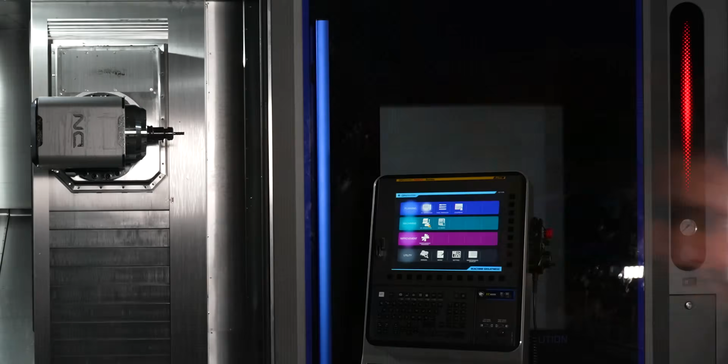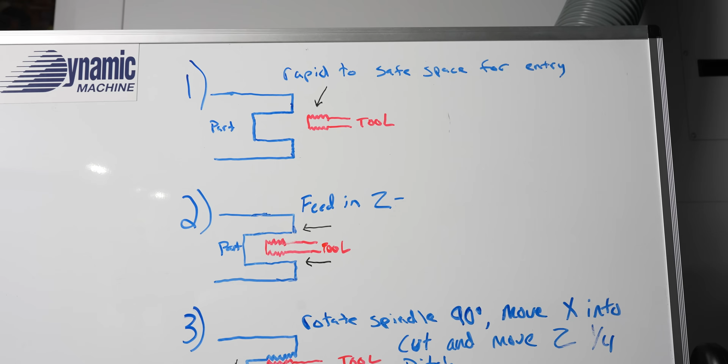Today I'm going to show you guys how to use a multi-tooth thread mill to mill your threads in one pass using the Z and C axis of your lathe. Now, there's a few parts to this video. If you just want to skip ahead to the part where I go over how to use the macro, it's down in the description below. You can copy it, paste it in your program, and go from there. But if you don't really know what we're going to do in this video, stay right here because I'm going to go over every single step as far as what we have to do to achieve a thread with a thread mill using the Z axis.

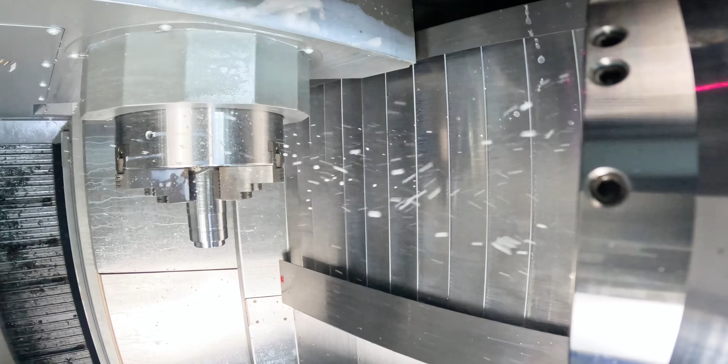Oh, there's always a glare. Okay.

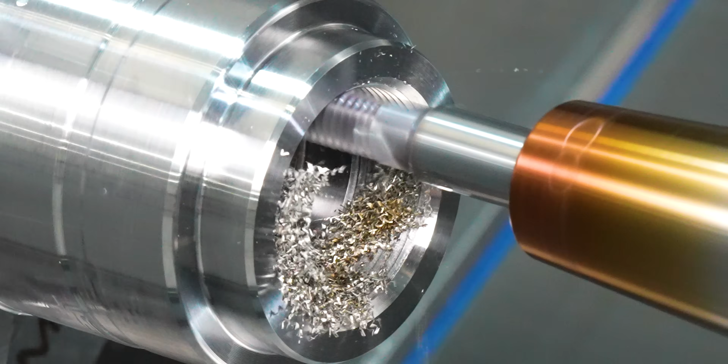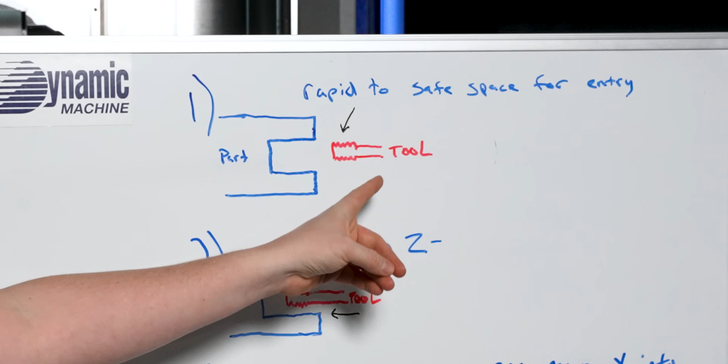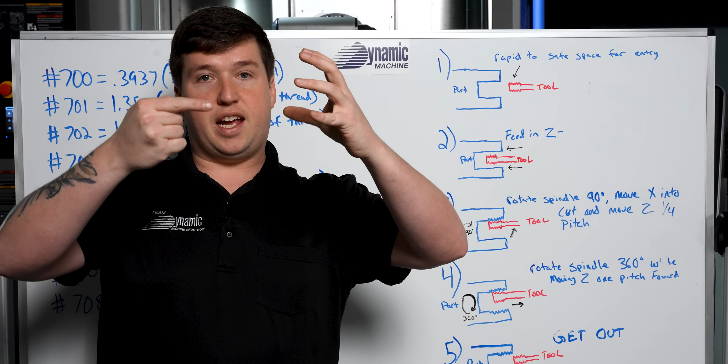So what do we have to do to achieve a thread in these circumstances? Well, first thing we're going to do is take our multi-tooth thread mill and rapid it to a safe spot in front of the material. Then the next thing we're going to do, step 2, is we're going to feed in Z. Now the next step, step 3, we need to rotate the C axis while bringing X up and Z forward. It's similar to the first video I did on this channel.

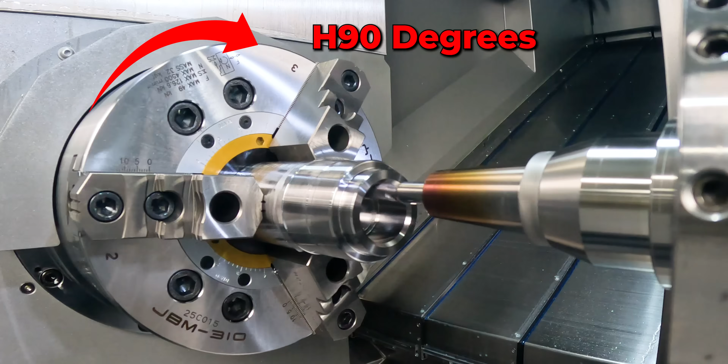You have to helix into your thread. If you just feed straight over, like if you were just to feed straight up in X and then start twisting, you would get a line across the threads because you didn't feed into the proper helix angle of the threads. So it's important that we move up, forward, and twist at the same time here in step 3.

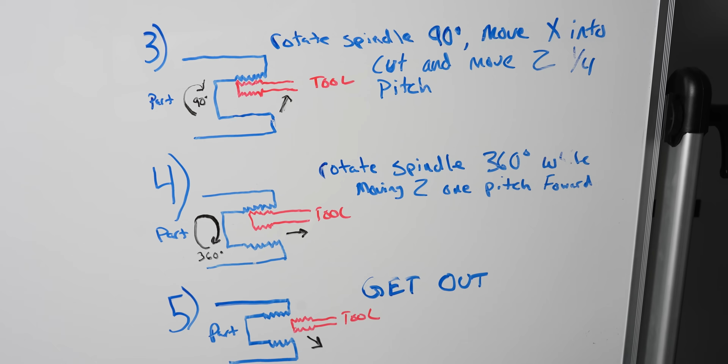Now the next step, step 4, we're going to do one rotation of our C axis while moving our Z axis forward one pitch.

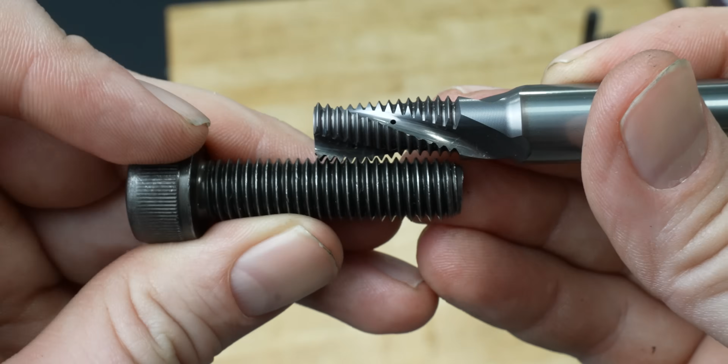It's important to note here that not every thread mill can make every thread. The thread mill you use has to be of the correct pitch of the thread you're trying to do. I mean, don't get me wrong, you could try to mess around with that, but it won't work.

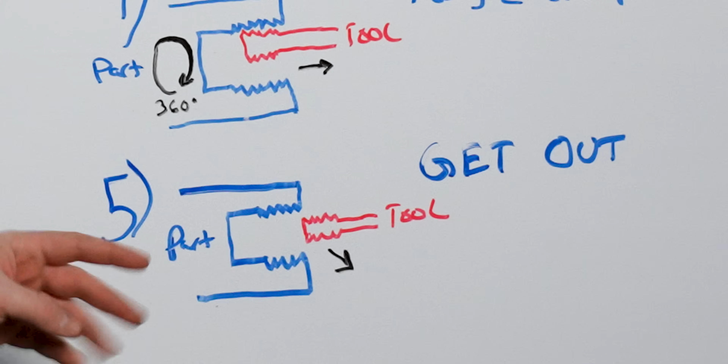Now, the next part, step 5, is actually 2 parts, but I ran out of room. We are also going to feed down in X and Z as we rotate out of the thread, and then step 6 would technically be however you want to go home.

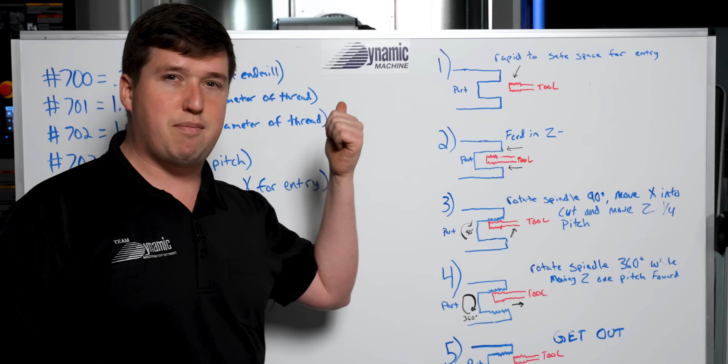Now, the parts of the code from the description below, you're gonna have to tweak a little bit. This is a CNC mill turn. You might be using a live tooling lathe or a different machine entirely, but the macro code itself will still work and do all these steps no matter what.

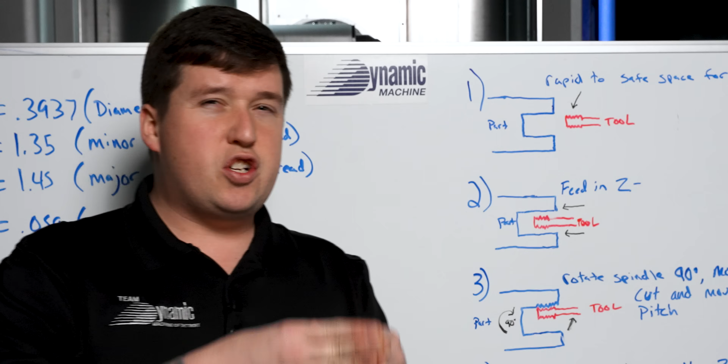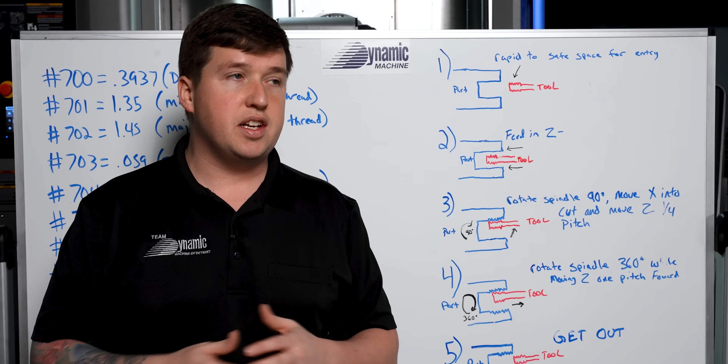Now, one important thing to note here, and this is actually very important, every machine tool builder looks at which way their C axis should rotate a little bit differently. So on steps 3, 4, and 5, you're gonna see H values. These H values are incremental for the C axis. Depending on the machine you're using, you might have to change positives to negatives or negatives to positives. There's nothing I can really do about that. Again, all these machines out there are different. It's kind of crazy actually, but it is what it is.

So if you're getting a left-handed thread when you wanted a right-handed thread, you need to change the H values that we're gonna go over in the later part of the video, which will be after this next part.

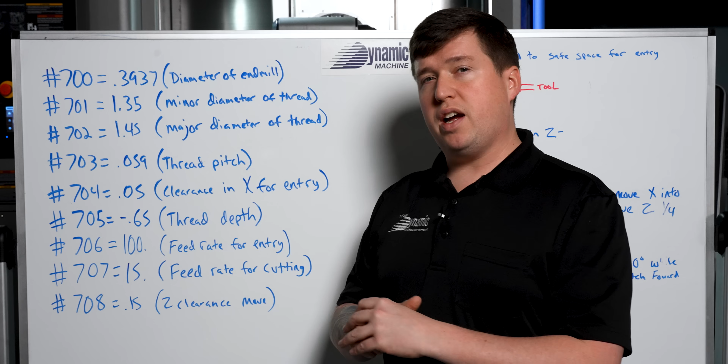So if you copied the program from the description below, you might notice there is a main spindle and a sub spindle version. That's because on most lathes, those are gonna be opposite directions in Z. So on the main spindle, we'll feed in negatively, and on the sub spindle, we will feed in positively. Just kind of is what it is.

I wrote 2 macros for you because I care that much. But inside this macro, you are going to notice we have pound 700 through pound 708. You fill out these variables, you'll make any thread your little heart desires. You just got to do it right.

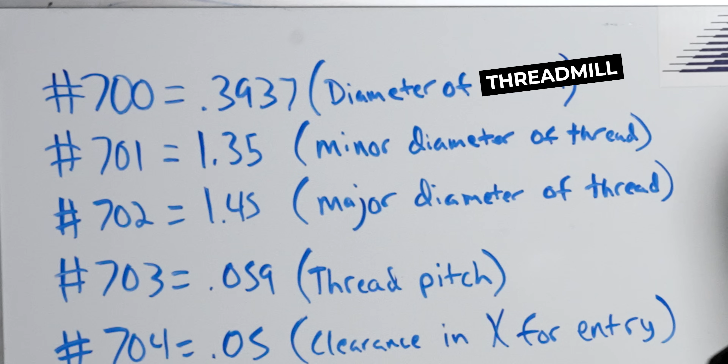So we're going to start off with the diameter of our end mill. That is pound 700. I had a 10 millimeter end mill, so in this case it was 0.3937. After that, we're going to have the minor diameter of your thread.

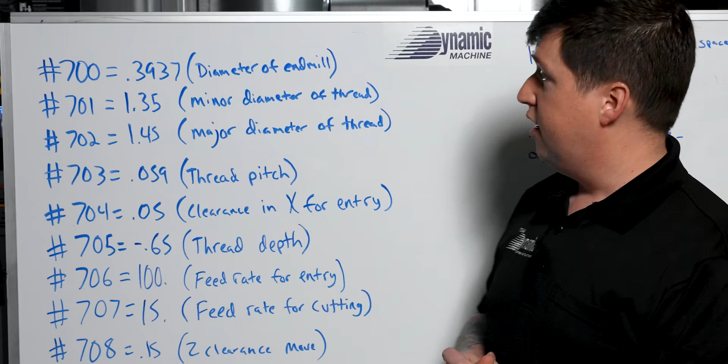You'll get why in a second, but that is for clearance. It is important that you put this in properly. The next one, pound 702, this is going to be the diameter you're going to cut to. This is the major diameter of your thread.

Now the next one, pound 703, that is going to be your thread pitch. I was using a 1.5 millimeter pitch thread mill, which in standard would come out to be 0.059. That is the thread pitch, how much it moves in Z during that revolution where it cuts the part.

Now this next one, pound 704, that is your clearance for entry. You will notice in the footage, I rapid it down in front of the part and then rapid it down in Z.

It's okay, you could come in. The manager and his wife come into Dynamic on the weekends and clean. It's actually very, very humble and very, very nice of them.

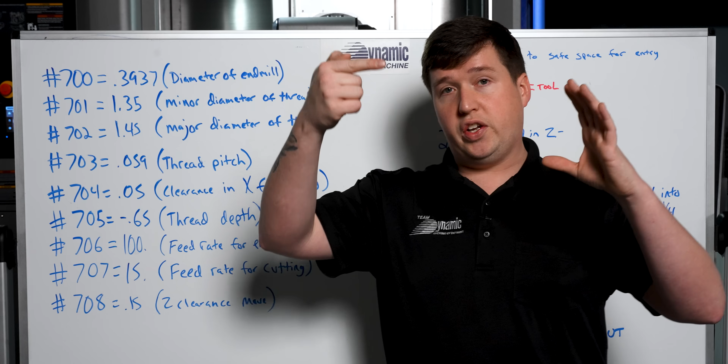So the next one is pound 704. This is your clearance for entry. When you watch this toolpath run, you'll notice I rapid it down in front of the part, rapid it down to depth, and then start cutting. During that point in the process, it would be pretty stupid if we hit any metal. So we need to clear that metal by a given amount. That's exactly what pound 704 is. This will clear your minor diameter by 50 thousandths, or you could use 100 thousandths, 200 thousandths, 1 millimeter, 3 millimeter—doesn't matter, whatever you put in there, it's going to clear.

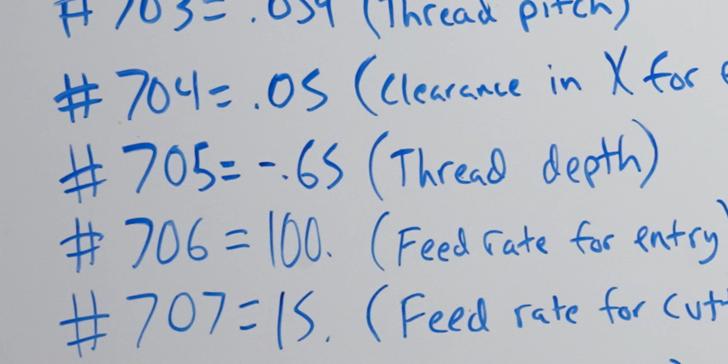Now pound 705 is going to be your thread depth. The way I wrote this macro, it actually goes a little bit past that for the helix up, so this is really the point where it starts cutting. That's exactly how deep my thread's going to be. In the footage, I went to 650 thousandths.

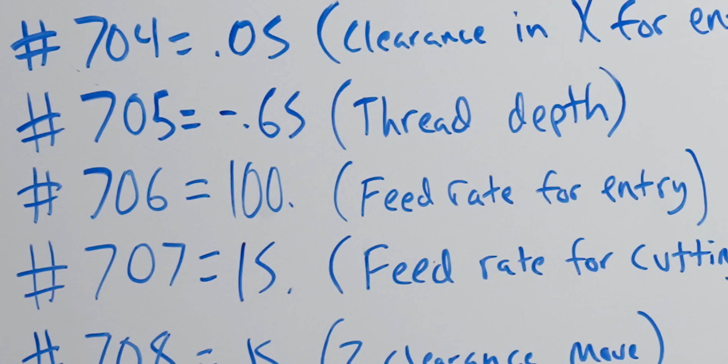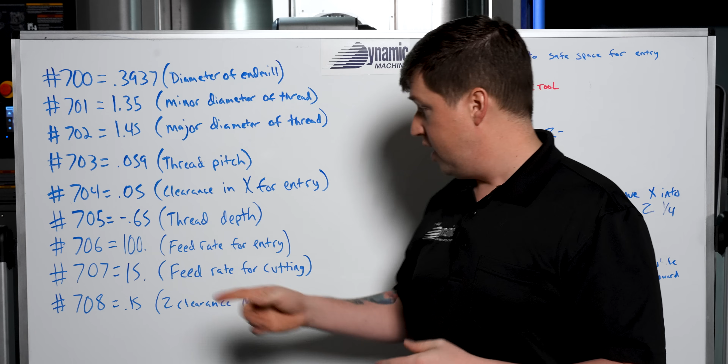Now your next pound variable is pound 706. This is your feed rate for entry. I lied a little bit earlier—we are not rapiding down the hole. I really don't like doing that in programs because if you screw up, there's not a lot of time to see what's going on. So this is how quick it's going to go down to depth. Here I used 100 inches a minute.

Quite magical. The next one is pound 707. This is going to be your feed rate while cutting. Here I went 15 inches a minute. After it gets down to depth, it's going to start using this pound variable for how fast it's going to cut. And then the last one, but very much not least, this will be a Z clearance move.

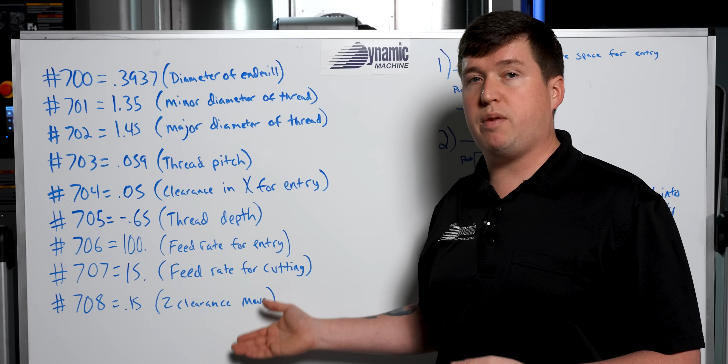Now, if you're working on the main spindle on a traditional lathe, you're going to want this number to be positive, because you want to be on the positive side—you don't want to run into your part. And on your sub spindle, you're going to want this to be negative, because on the sub spindle side, we clear from the negative side.

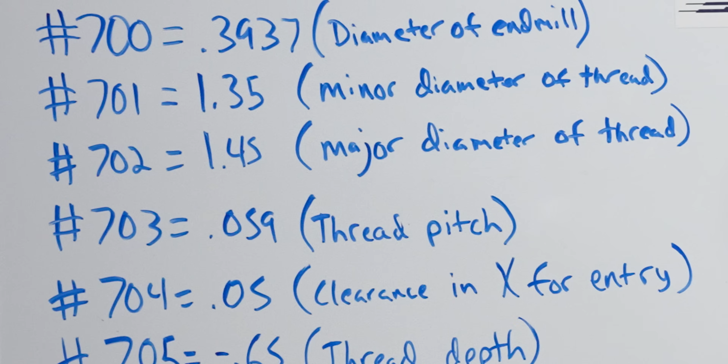Those right there are all the variables you need to know about. If you take all of this and put it in your program, type in this information, adjust some of the codes accordingly—because every machine's different, just how it is—then you can get yourself a magical thread. It'll be the most magical thread you've ever created.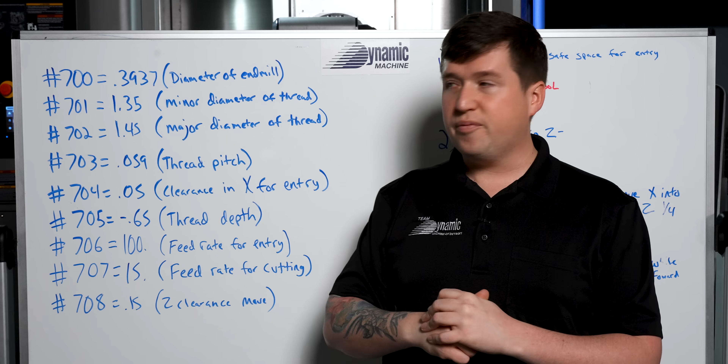All right, that's how the ThreadMill actually works. Now I have to go over the part where I really wish I had a teleprompter for this channel, because I have to go read the macro off the control since I wrote it two weeks ago.

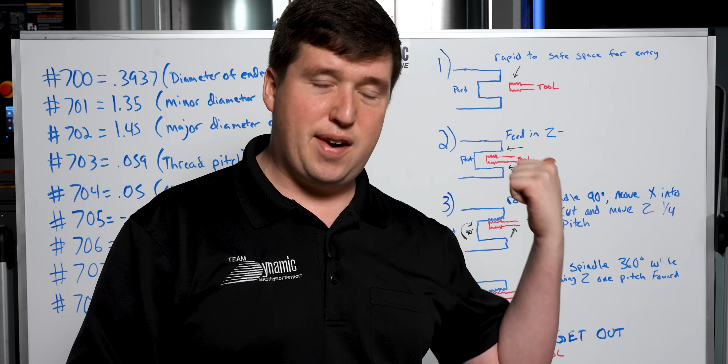So, line by line, what is the thought process behind this macro? Well, it's very simple. So in this video, we're actually going to really lay it out for you.

The first thing we need to do is rapid up to a point that's safe for the ThreadMill to feed in—this is our approach point. That's X of pound 701, the minor diameter of your thread, minus pound 700, your ThreadMill, minus pound 704, your clearance moves. This makes it so when our ThreadMill rapids in, it's safe to clear the minor diameter of our threads. Now at this point, I will go to Y of 0.

It's pretty important that your tool's on center here. And then you'll notice I go to Z of pound 708—as we just went over, that is your clearance move in Z. It's also important to put your C axis in some sort of reference position here, so I put C of 0 where I wanted the thread to start. You could change this, of course.

If you want to start at a different C position, go ahead, put C 35 point, it doesn't really matter. You're still going to get a thread.

This next line is going to be where we infeed to before we start cutting. Now it's important to note here, I wanted to make it where it starts cutting is actually the depth you programmed. And when we infeed to this point, we are going to rotate 90 degrees, which is a quarter of a revolution, which will be a quarter of the pitch programmed.

So you'll notice I go to Z of pound 705 minus pound 703 divided by 4. That's going to be our depth plus 1/4 of a pitch, because we're going to go 1/4 of a revolution when we infeed into the part.